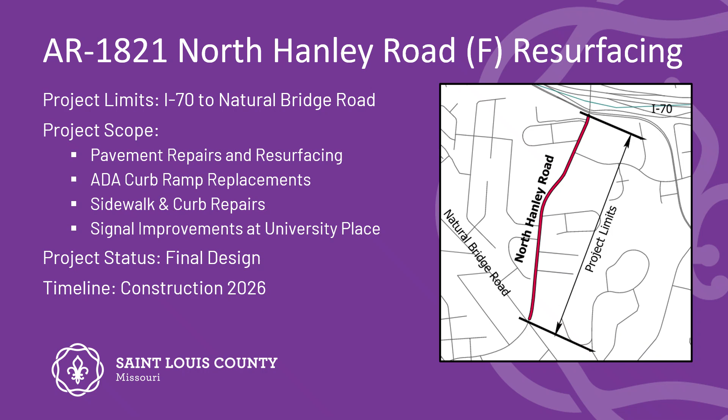The project is currently in final design, and construction is anticipated to begin in 2026. To avoid the need for eminent domain, we had to make design revisions to a number of parcels on North Hanley. This includes reducing curb ramp widths to 4 feet at a few locations, but the ramps still meet existing sidewalk widths and are ADA compliant.

To get ADA compliant designs within the right-of-way, we had to tighten the corners at Katherine Avenue, Jane Avenue, and Alva Avenue. These streets are all residential, with 2 being no outlets. We reviewed typical vehicle sizes, and all the vehicles reviewed, including emergency service vehicles, can still make those corners.

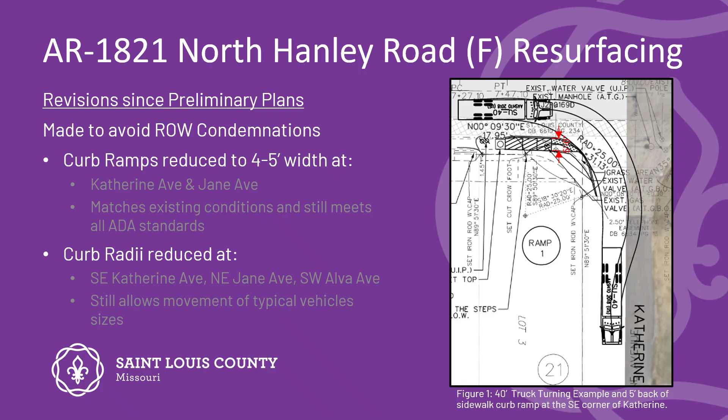The North Hanley design has been revised to provide some additional pedestrian improvements at University Place Drive, including wider sidewalks. There's also been coordination with Metro regarding the usage of bump outs at existing bus stops, as there wasn't enough right-of-way to allow an ADA bus stop behind the existing curb. These bump outs range from 7 feet to 30 feet in width, depending on the existing conditions at each location.

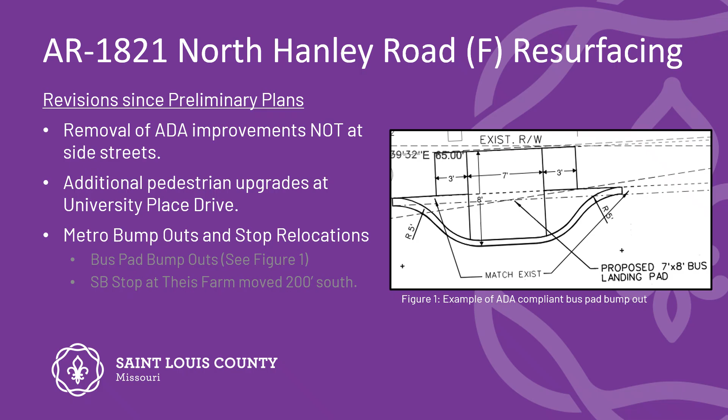The Olive Boulevard resurfacing project is located between Ferguson Avenue and Skinker Boulevard. The project includes pavement repairs and resurfacing, pedestrian improvements at cross streets, repairs to existing infrastructure, signal improvements at the Kingsland Avenue intersection, and lane reductions to add new on-street bike lanes.

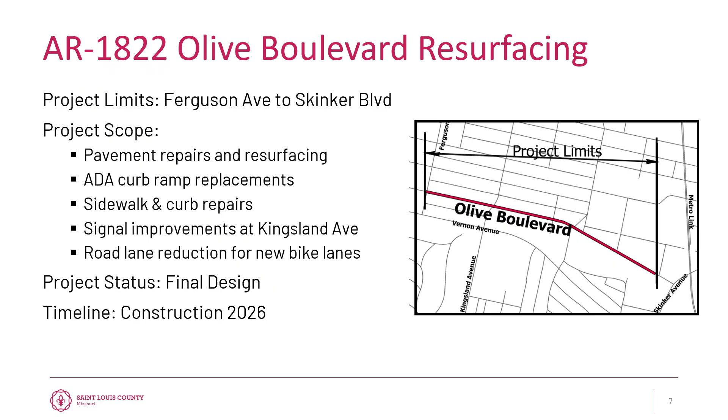The project is currently in final design, and construction is anticipated to begin in 2026. To avoid the need for eminent domain, we had to make several design revisions along Olive Boulevard. This included providing an alternate curb ramp design, such as the Westgate Avenue example shown in Figure 1. At these locations, we fit ADA compliant ramps within the existing right-of-way to avoid easements.

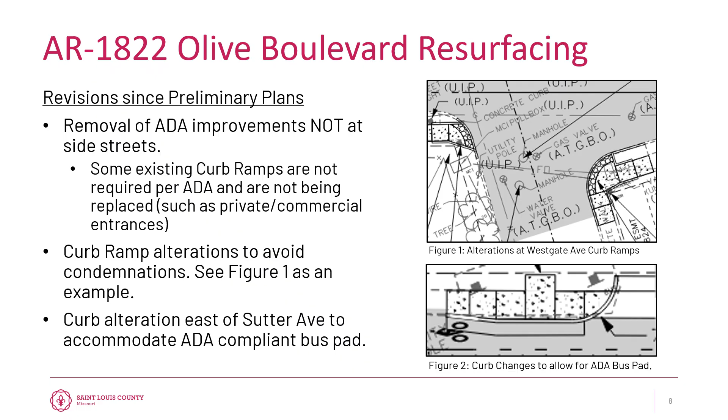In addition, the proposed bike lane had to be reduced by 1 foot to a total width of 4 foot 6 inches for a curb extension east of Sutter Avenue. This reduction was made to accommodate an ADA compliant bus pad.

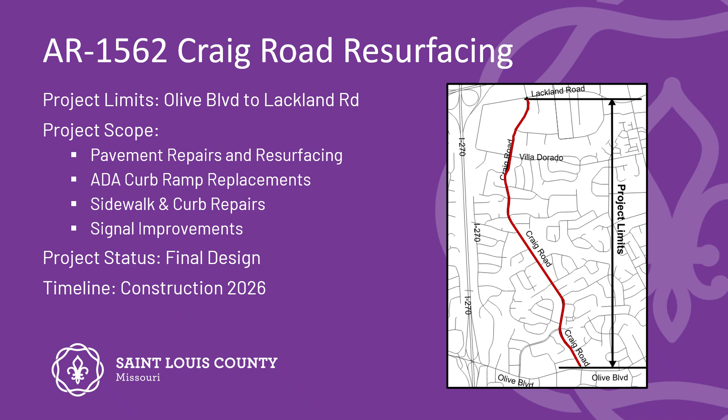The following two projects are located within Council District 2. Starting with the Craig Road resurfacing project, it's located between Olive Boulevard and Lackland Road. The project includes pavement repairs and resurfacing, pedestrian improvements at cross streets, repairs to existing infrastructure, and signal improvements at the intersections of the West Oak Shopping Center, Ballas Road, Craig Elementary School, Villa Dorado Drive, Borman Drive, and Lackland Road. The project is currently in final design, and construction is anticipated to begin in 2026.

To avoid the need for eminent domain, we had to make several design revisions along Craig Road. We provided alternate ADA compliant curb ramp designs, which were fully within existing right-of-way. To keep these improvements within right-of-way, the corner had to be tightened at Northwest Orchard View Drive, reducing it from 32 feet to 25 feet. We reviewed typical vehicle sizes, including emergency service vehicles, and they all can make this corner.

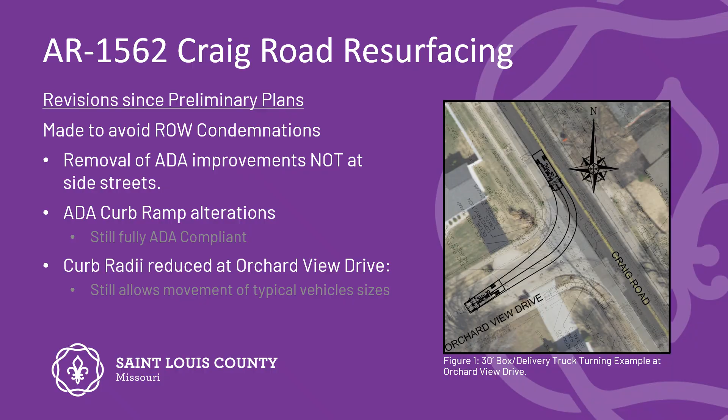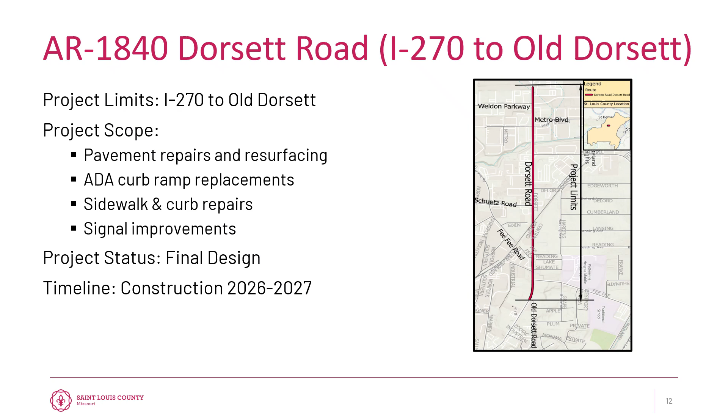The Dorsett Road resurfacing project is located between I-270 and Old Dorsett Road. The project includes pavement repairs and resurfacing, pedestrian improvements at cross streets, repairs to existing infrastructure, and signal improvements at the intersections with Weldon Parkway, Metro Boulevard, Millwell Drive, Schuetz Road, and Fee Fee Road. The project is currently in final design, and construction is anticipated to begin in 2026.

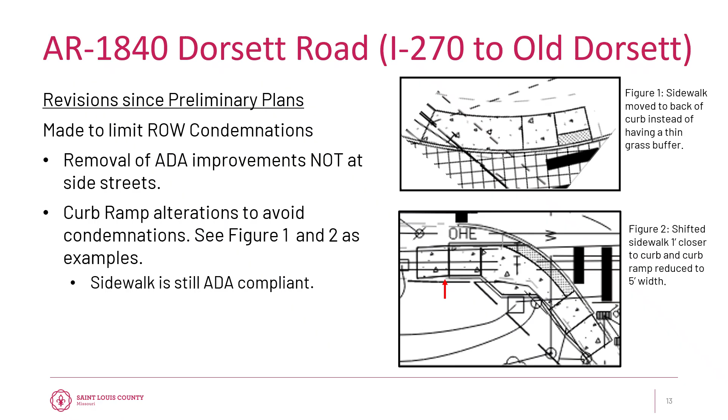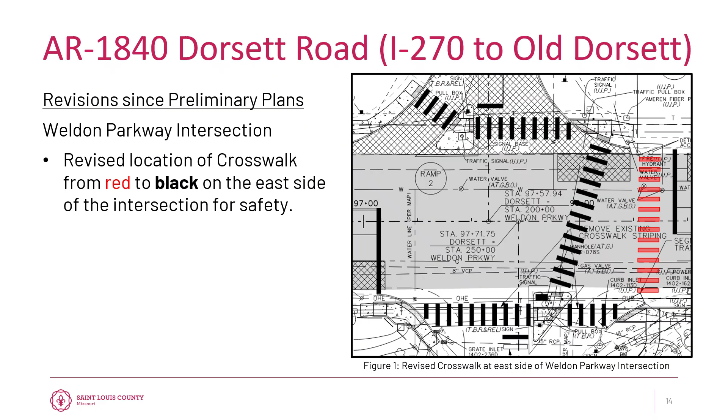Yielding vehicles may not be aware of pedestrians crossing if they're looking back toward their left for an opportunity to turn right onto Dorsett Road. The following 2 projects are located within Council District 3.

The Big Bend Road resurfacing project is located between Lindbergh Boulevard and Couch Avenue in the city of Kirkwood. The project includes pavement repairs and resurfacing, pedestrian improvements at cross streets, repairs to existing infrastructure, various safety improvements, and signal improvements to the intersections of Couch Avenue and Geyer Road.

The project is currently in final design. There is ongoing coordination with the Burlington Northern Santa Fe Railroad regarding the crossing at the Geyer Road intersection. Construction is anticipated to begin in 2026, but may not be completed until 2027.

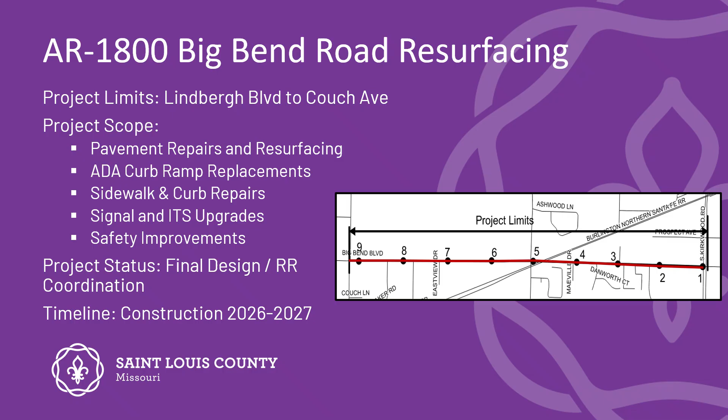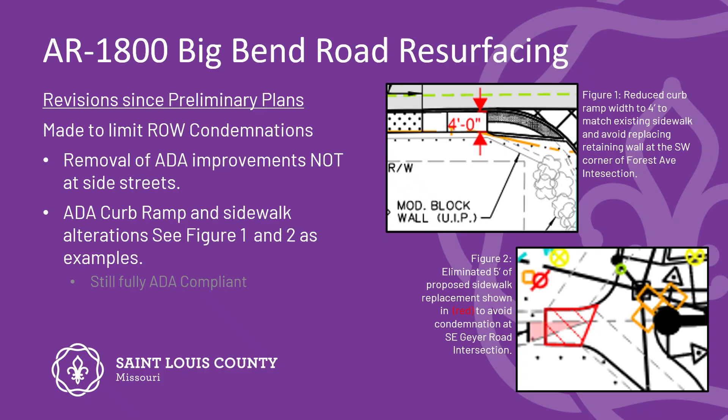The final designs for all locations along Big Bend Boulevard are fully ADA compliant, even though several spots may deviate slightly from St. Louis County's typical design standard.

We are still in coordination with the railroad regarding the at-grade railroad crossings at the Geyer Road intersection. We're working to obtain approval from the railroad prior to receiving final plan approval from MoDOT. Although progress is being made, some of the prior pedestrian improvements proposed at this intersection may be revised due to the railroad's requirements. We'll keep the public informed regarding any required design modifications.

On to the Sulphur Spring Road resurfacing project, which is located between Manchester Road and Big Bend Road. The project includes pavement repairs and resurfacing, pedestrian improvements at cross streets, repairs to existing infrastructure, and signal improvements at the intersections with St. Joseph's Lane, Coventry Lane, and Wren Avenue.

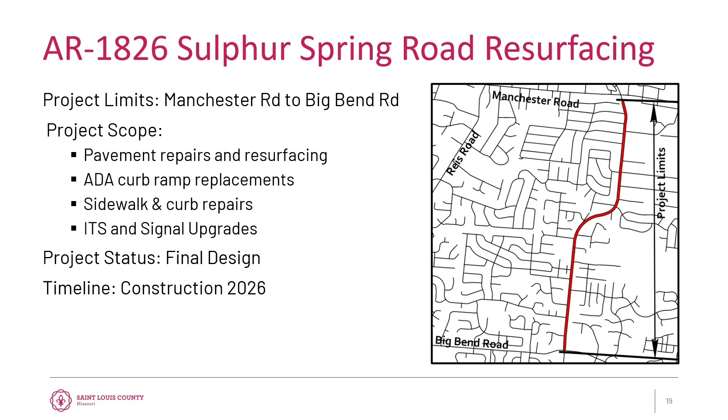The project is currently in final design, and construction is expected to begin in 2026. To avoid the need for eminent domain, we had to make several design revisions along Sulphur Spring Road. This includes providing alternate ADA-compliant curb ramp designs, which were fully within existing right-of-way.

We reviewed typical vehicle sizes, including emergency service vehicles, and they can still make these movements even with the slightly reduced corner.

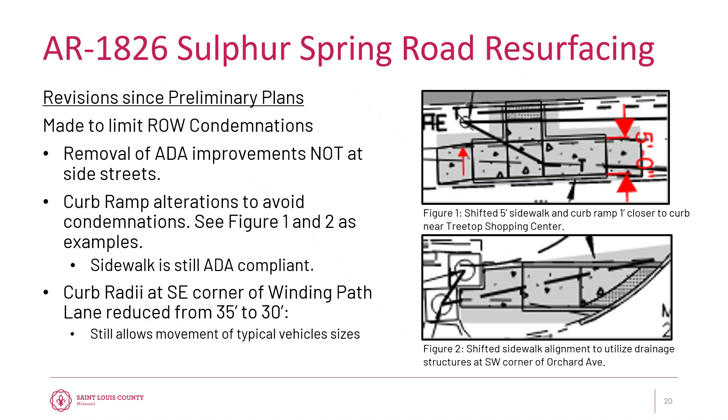The following 3 projects are located within Council District 4. The Charbonier Road Resurfacing Project is located between Howdershell Road and Lindbergh Boulevard. The project includes pavement repairs and resurfacing, pedestrian improvements at cross streets, repairs to existing infrastructure, and new sidewalk at St. Ferdinand Church, and signal improvements at Lawson Elementary School.

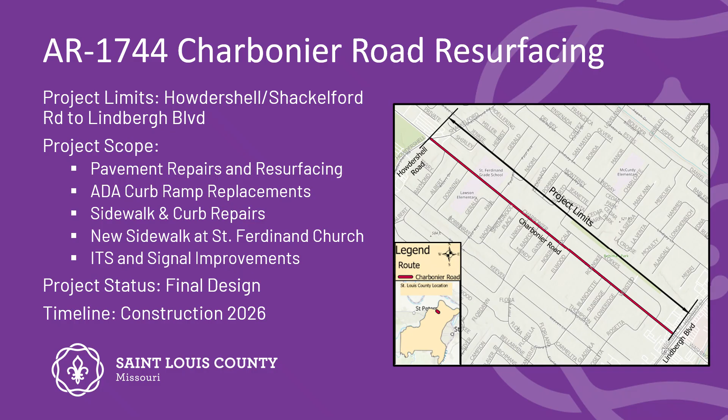The project is currently in final design, and construction is anticipated to begin in 2026. To avoid the need for eminent domain, we had to make several design revisions along Charbonier Road. This included providing alternate ADA-compliant curb ramp designs, which were fully within existing right-of-way.

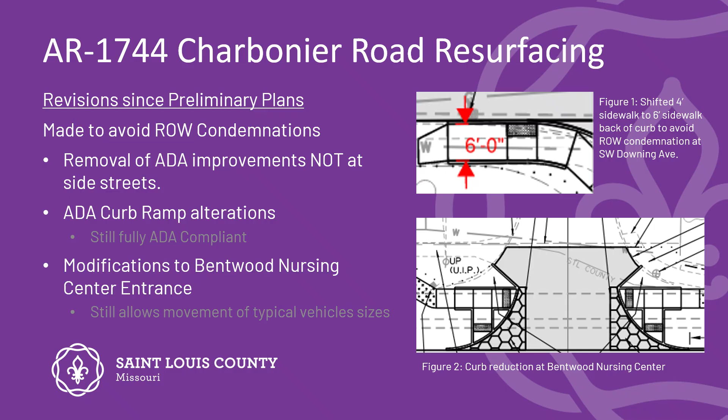Figure 1 utilizes a 6-foot sidewalk in the back of the curb rather than a grass buffer between the curb and a 4-foot sidewalk. The existing Bentwood Nursing Center entrance width is being modified to closer resemble a standard commercial entrance. We reviewed typical vehicle sizes, including emergency service vehicles, and they can still make this corner even when it's slightly reduced. This modification allows for safer pedestrian facilities at the intersection at Linkus Drive.

Now to the Old Jamestown Road Sidewalk Project. This is located between Hazelwood Central Middle School and Jamestown Elementary School. This is the 3rd and final phase of the sidewalk improvement project on Old Jamestown Road, and it spans from Parker Road to Hazelwood Central Middle School.

The project includes new sidewalk along the east side of the road. Additionally, driveway replacements and drainage improvements will occur along the project limits. The project is currently in final design, and construction is anticipated to begin in 2026, pending completion of the property acquisition phase.

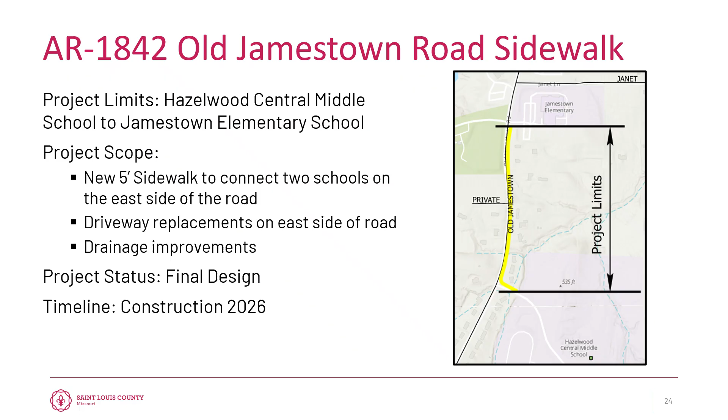To avoid the need for eminent domain, we had to make one notable change along Old Jamestown Road. The proposed sidewalk was planned to have a grass buffer between the roadway, but there was one property where the sidewalk had to be realigned to the back of the proposed curb for a length of approximately 185 feet. The sidewalk width in this section varies between 4 and 5 feet. Although this does not meet St. Louis County's typical design standards, it is still fully ADA compliant.

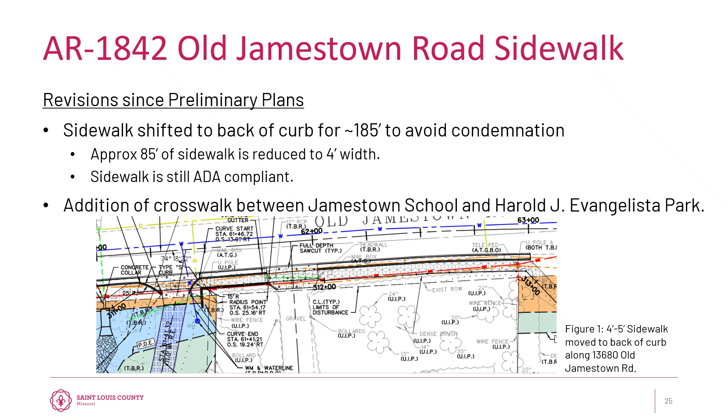Also, since the preliminary plans were first shared with the public, we've added a crosswalk and curb ramps to connect Jamestown Elementary School with a local park.

The Redman Road resurfacing project is located between Old Halls Ferry Road and Lewis and Clark Boulevard. The project includes pavement repairs and resurfacing, pedestrian improvements at cross streets, repairs to existing infrastructure, and signal improvements at the intersections with Old Halls Ferry Road, Jerries Lane, Keevan Elementary School, and Graneman Elementary School. The project is currently in final design, and construction is anticipated to begin in 2026.

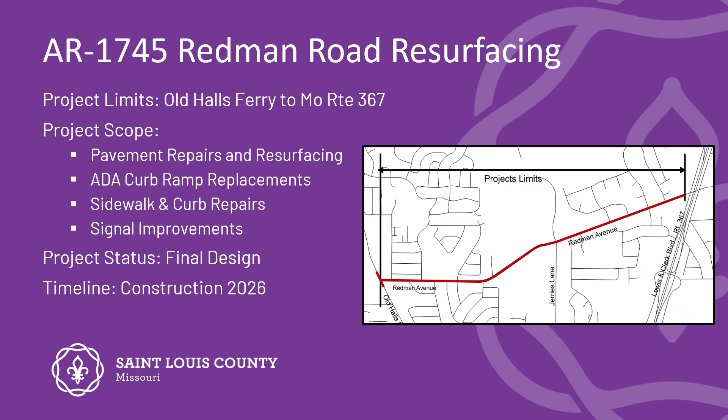On Redman Road, to avoid the need for eminent domain, we had to make one design revision at Rockgate Court. To get ADA compliant designs within right-of-way, the curb at Southeast Rockgate Court had to be reduced to 25 feet. We reviewed typical vehicle sizes and all vehicles, including emergency service vehicles, can still make these movements, even with a slightly reduced corner.

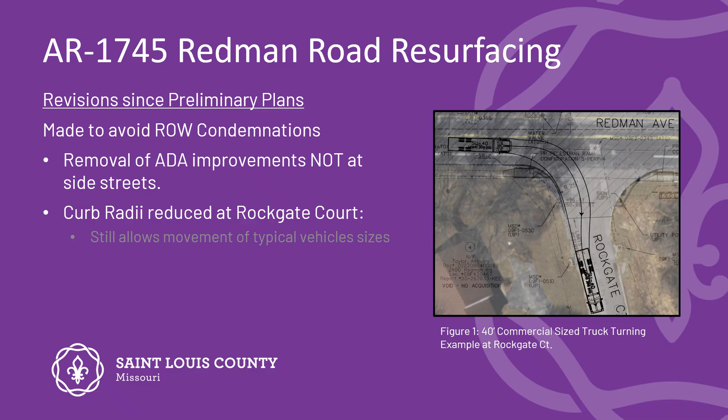The following 3 projects are located within Council District 5.

The Big Bend Boulevard resurfacing project is located between Laclede Station Road and East Lockwood Avenue in the city of Webster Groves. The project includes pavement repairs and resurfacing, pedestrian improvements at cross streets, repairs to existing infrastructure, and signal improvements at the intersections with South Old Orchard Avenue and Laclede Station Road. The project is currently in the final design stage, and construction is anticipated to begin in 2026.

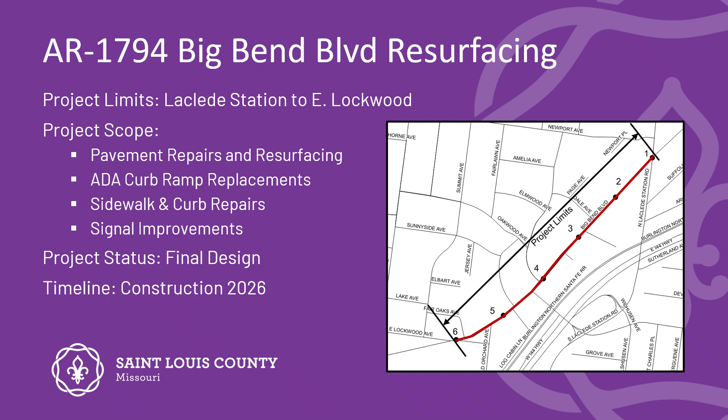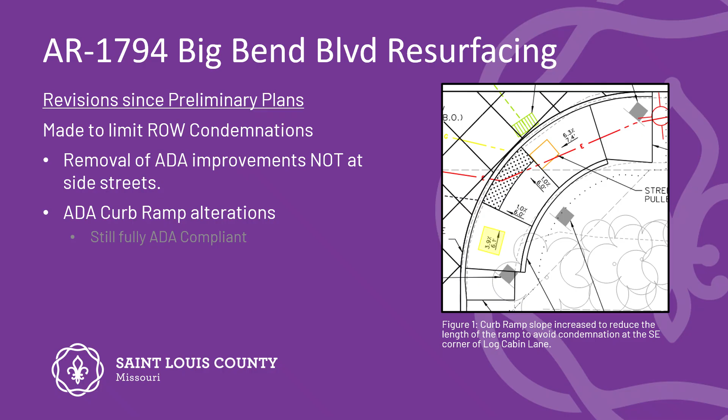To avoid the need for eminent domain here, we had to make one design revision at the southeast corner of Big Bend Boulevard and Log Cabin Lane. The curb ramp, shown in Figure 1, had its length and slope modified to fit the proposed ramp, and we had to transition the sidewalk fully within right-of-way. The modified ramp parameters still meet current St. Louis County design standards, and they are ADA compliant.

The Hanley Road Laclede Station Road resurfacing project is located between Newport Avenue and Manchester Road. The project includes pavement repairs and resurfacing, pedestrian improvements at cross streets, repairs to existing infrastructure, and signal improvements at Marshall Avenue, Oxford Boulevard, Sun Drive, and Flora Avenue. The project is currently in final design, and construction is anticipated to begin in 2026. It may not be completed, however, until 2027, pending final property acquisitions clearance.

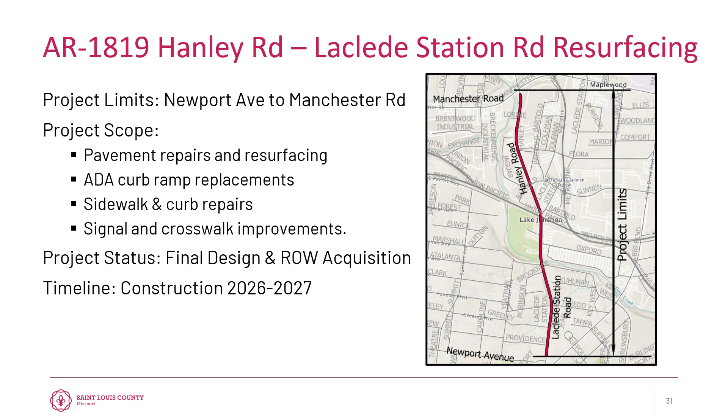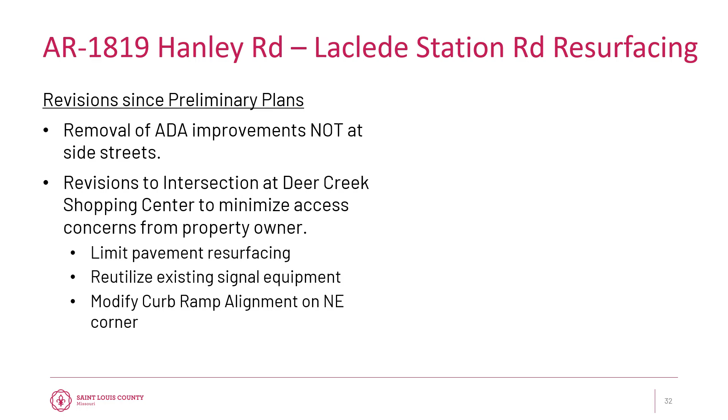To avoid the need for eminent domain, we're redesigning the improvements at the intersection with the Deer Creek Shopping Center. We're addressing property owner access concerns that may take place during construction. The intersection will still include new ADA compliant curb ramps and pavement resurfacing within St. Louis County's right-of-way, but it will limit paving, median realignment, and signal improvements on the Deer Creek Shopping Center property.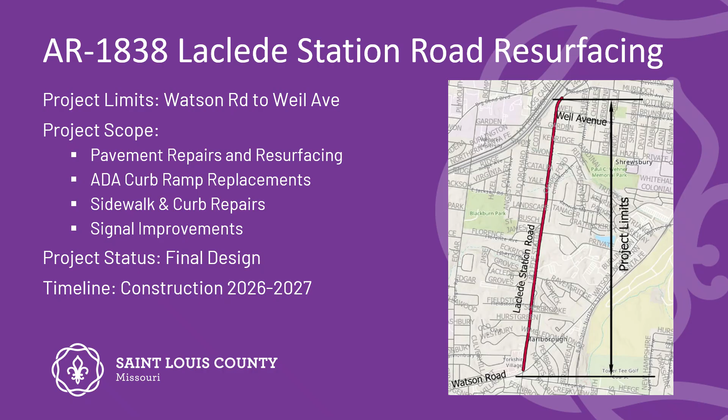To minimize property acquisitions, we made a number of design revisions along Laclede Station Road. This included a reduction of curb ramp widths to 4 feet along the majority of the proposed replacements along that corridor. The reduced 4-foot curb ramps meet existing sidewalk widths, and they are still ADA compliant.

To get ADA compliant designs within the right-of-way at the southeast corner of Weil, the corner was tightened and reduced to 20 feet. We reviewed typical vehicle sizes, and all of them can still make the corner, including emergency service vehicles. Larger vehicles, however, such as tractor trailers, may need to use both northbound lanes to navigate the right turn. Those are rare occasions, though.

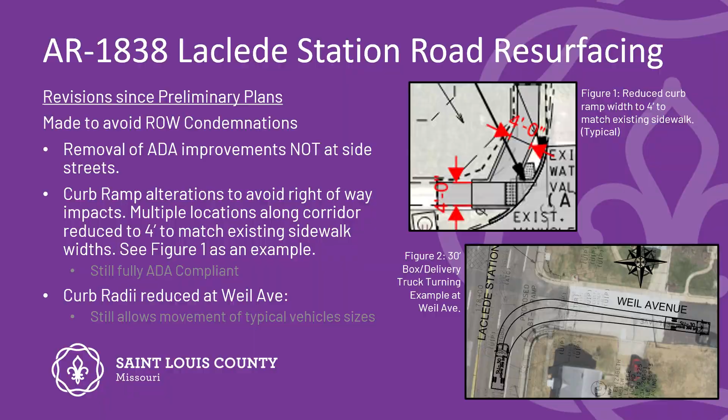The following project is located within Council District 6. The Baumgartner Road resurfacing project is located between Old Baumgartner Road and Telegraph Road. The project includes pavement repairs and resurfacing, pedestrian improvements at all cross streets, repairs to existing infrastructure, drainage improvements at the Oakville Shopping Center and near Fireleaf Drive, and signal improvements at the intersection with Gebhardt Drive. The project is currently in final design, and construction is anticipated to begin in 2026.

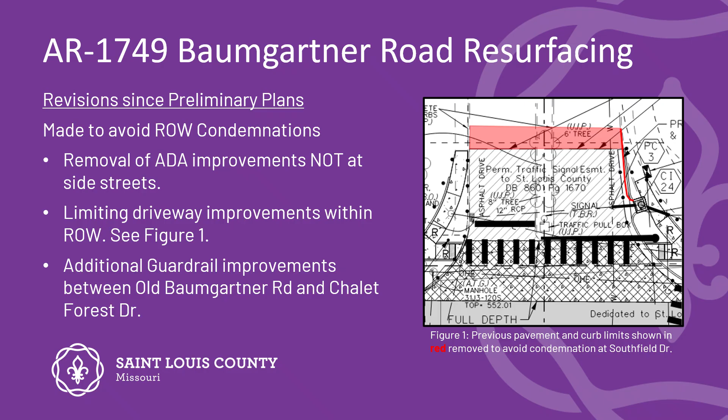In addition, we're making more safety improvements by replacing existing guardrail and adding new guardrail between Old Baumgartner Road and Chalet Forest Drive. And that concludes our presentation.